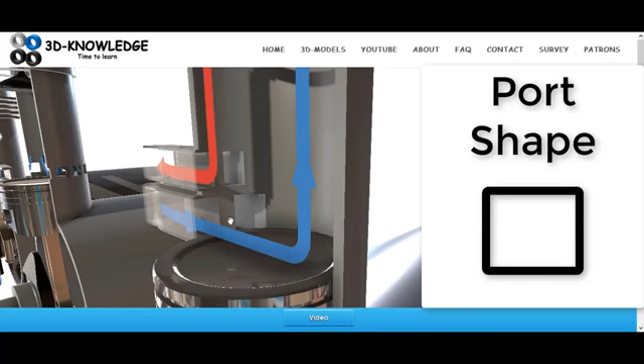This makes sense because you want to get the exhaust gas out quickly, and ideally you want to be drawing in a larger volume of air, and you need to do this quickly, so you'll make the charge air ports larger. Also notice the shape. The shape of these ports actually imparts swirl onto the air as it comes in. So this means that as the air is coming in, it's going to have a swirling motion.

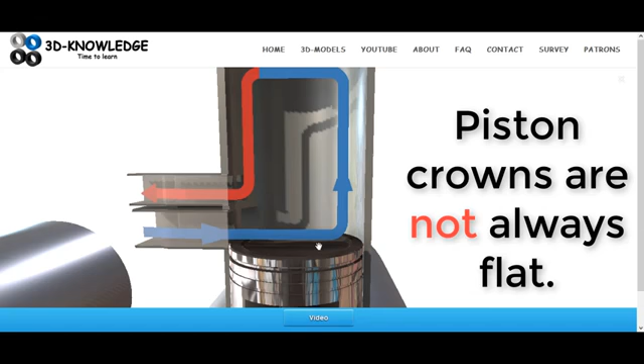The shape of the piston, and this is perhaps not the best piston here to display this, but the shape of the piston itself also has an impact upon where the air is going. The piston crown, that's this here, the top of the piston, it will often have a depression slightly larger than this, and that will impart not so much swirl but direction to the air as it comes through, and will help it to loop up and go back down out of the exhaust port.

So you're using the shape of the inlet ports to impart swirl, and also the shape of the piston crown to direct the air. If we go back to the cross-flow scavenging mode, this piston as well may be slightly different to what you would truly see in an engine of this type.

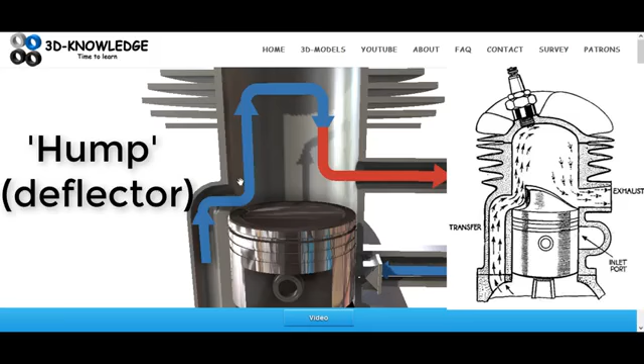In an engine of this type you may actually see a small hump here, and the hump is designed to direct the air upwards as soon as it starts coming in. So the air would come in, it would bounce off this tiny bump on the piston, and it would go up here and back round, and this helps with the scavenging process and makes it more efficient.

And last but not least, we have uniflow. Now uniflow is a type of scavenging mode that you're not going to see very often. In fact, to my mind, you only see it on large two-stroke engines, particularly marine vessels, so large container ships, large oil tankers and things like that.

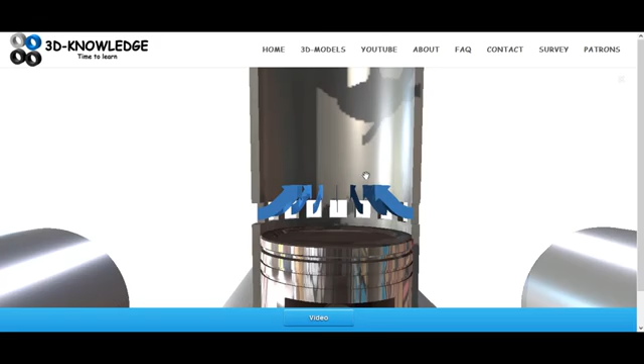You can see the ports at the bottom here, there's a lot of them. They allow a lot of air in, so the air is coming in very quickly and in large volumes. And this air is displacing the exhaust gas here, which is going to be let out through this valve. You can also see two fuel injectors. I'd say normally you'd have three, but you can see two fuel injectors here for injecting fuel.

And the whole process is very efficient. You're getting large volumes of air in the base, and you're also getting a lot of exhaust gas out at the top. And because of the way the air is flowing into the cylinder, the temperature gradient across all the parts here is relatively low. So you're not getting some very high hot spots. You're actually getting a good spread of temperature across all the parts. And this is quite important.

In addition to that, because of the way the air is flowing in and the way the exhaust gas is taken out, it's very, very efficient. It's not like, for example, on the cross-flow here where the air comes in, but some of the air will also go out the exhaust port. That doesn't happen here. What will happen is the air will come in, and fair enough, some of it may go out beyond the exhaust gas valve, but generally you can control it a lot better than you can with a cross-flow engine, so you'll waste a lot less air, and all of this leads to higher efficiency.

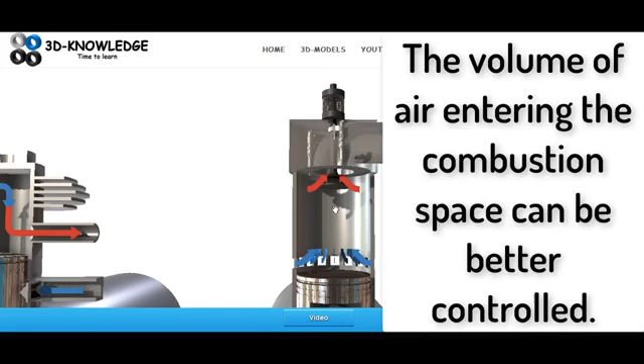You'll also notice it's not shown on these models, but it's something worth considering. The piston skirt for Uniflow can be quite short. When I'm talking about a piston skirt, I mean this area here. Actually, sorry, here. This area here, the piston skirt, on a Uniflow engine can be quite small. On the other engines, it has to be slightly longer.

Now, why is that? Well, if you look over here, the piston skirt is used for covering up ports. You see here it covers the air inlet. You can see here it's going to cover this area here as well. And as it moves further up, it's going to cover the exhaust port here. But you need a long piston skirt to make sure that the timing is correct. If you make the piston skirt very small, then you're going to be sucking air in too early, or you're going to be closing this air off too late, etc.

Whereas on the Uniflow engine, the piston skirt can be quite small, because as soon as it's gone past the scavenge air inlet ports here, there is no more timing. The piston goes up to the top, it's going to compress the air, it's going to go through our usual compression, ignition and power stroke, and then as the piston comes back down again, the exhaust port can open.

The scavenge air ports will automatically be opened because the piston's gone past the ports, and the air will rush in. So although there is some timing involved with Uniflow, it's not to the same degree as with cross-flow or loop flow, where the timing is dependent totally on the piston skirt.

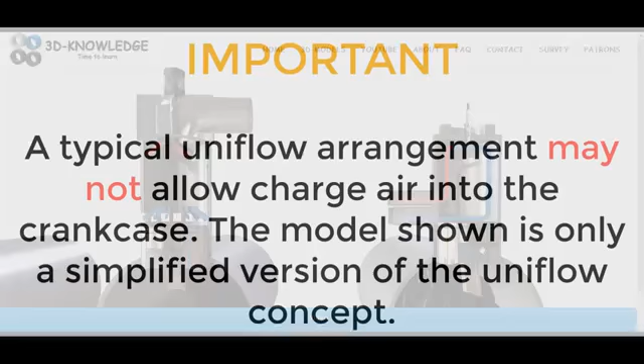Even here, if we go over to loop flow, you can see straight away that the piston skirt is that long. So as the piston comes up, it's going to cover both of these ports. As the piston comes back down, it's going to uncover the exhaust port and then the scavenge air port. But